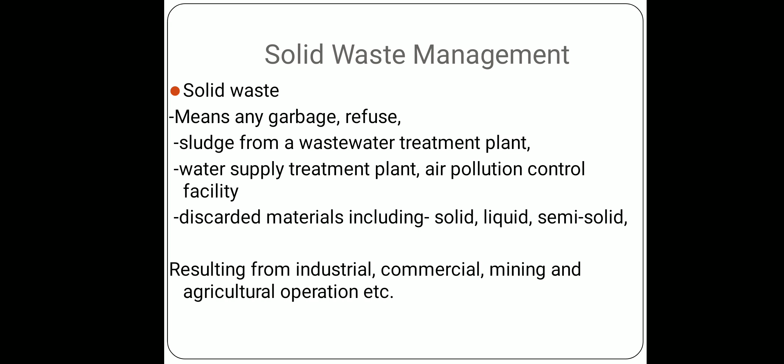Today we will see the new topic related to the environment, that is solid waste management. First, let's see what is meant by solid waste. Solid waste means any garbage or refuse. It may be sludge from wastewater treatment plant, water supply treatment plant, air pollution control facilities, or discarded material including solid, liquid, or semi-solid, resulting from industrial, commercial, mining, as well as agricultural operations.

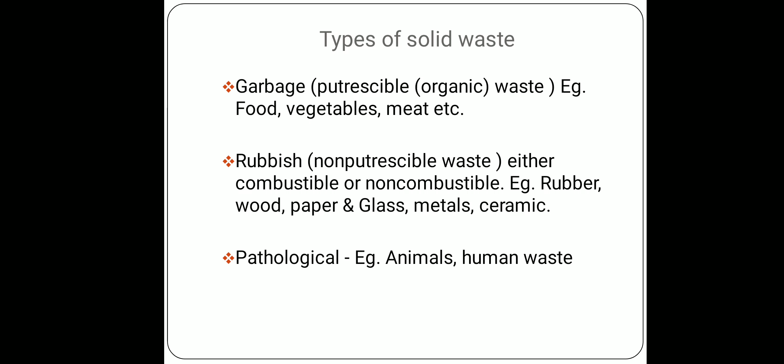There are different types of solid waste, like garbage, that is organic waste, example food, vegetables, meat, etc. Then rubbish, that is non-putrescible waste, either combustible or non-combustible, example rubber, wood, paper, glass, metals, ceramics, etc. Then pathological material like animals, human waste, etc.

These solid wastes are classified as domestic waste, which is material generated in homes. Then industrial waste, example paints, sand, metal, different chemicals, depending on the type of industries, there are different types of solid waste generation. Then biomedical waste, generally generated in hospitals. Then agricultural waste, that is farm animal manure and crop residues.

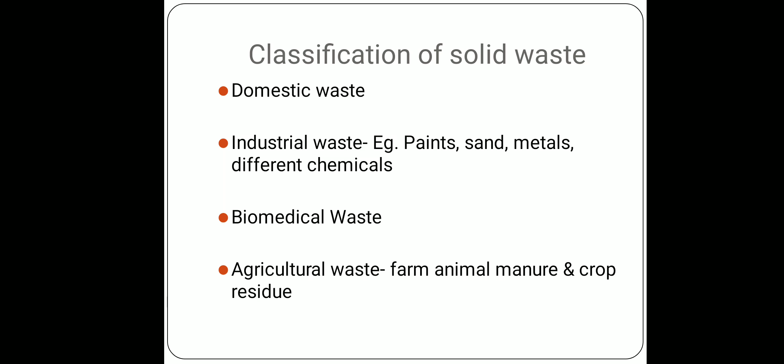There are different types of solids which affect the environment in different ways. Let's see the impact of solid waste on environment. It may be responsible for different types of diseases, obstruction of drains, and it causes different pollutions, example land and water pollution. Many times it may be responsible for air pollution as well.

Spreading of different types of diseases. Flies also spread diseases like diarrhea, dysentery, etc. Due to dumping of waste, there is decrease in soil fertility and loss of biodiversity. If solid waste is not properly managed and is disposed anywhere haphazardly, then definitely it is responsible for the degradation of that area, that is soil of that particular area, due to different types of solids.

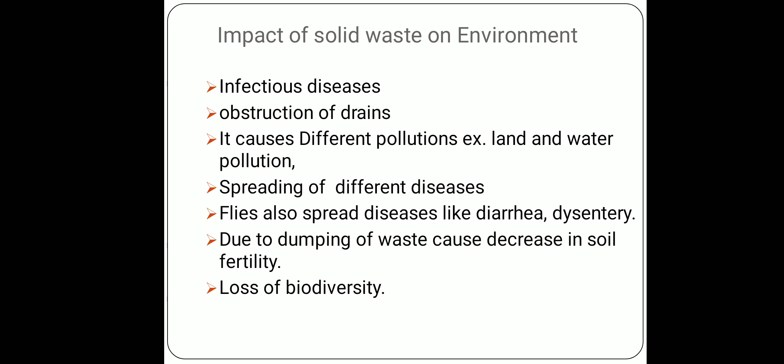Definitely there will be effect on the surrounding environment, and directly or indirectly it is responsible for degradation of the environment and loss of biodiversity. Again, it is harmful for the environment.

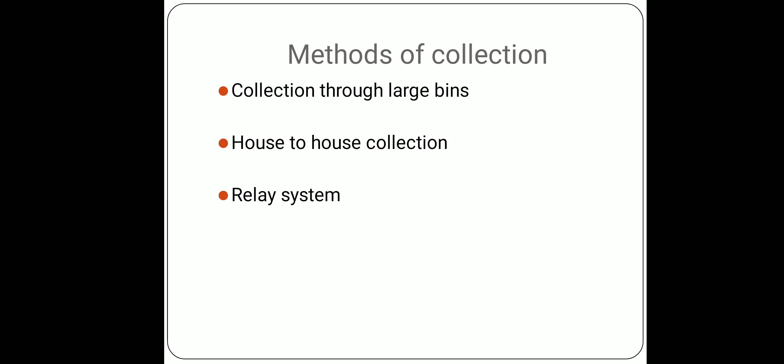There are different methods of collection of solids, that is collection through large bins, generally done in municipal areas. Then house to house collection. Then another method is the relay system. This is the vehicle which is used for collection of solid waste, and it is rear loading compactor.

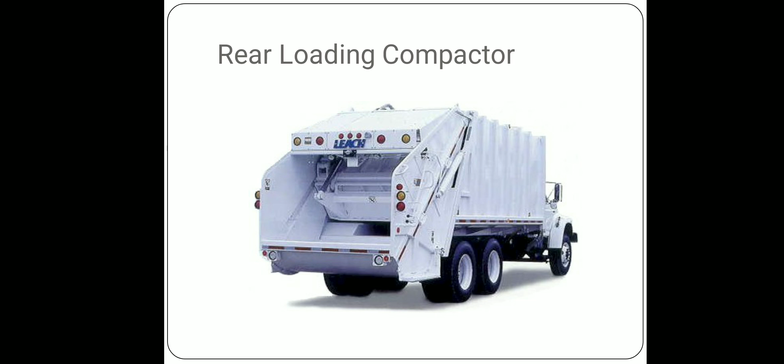There are different systems of collection of solid waste, that is refuse collection system, which is effective in residential areas. Then commercial waste collection. Then recyclable material collection.

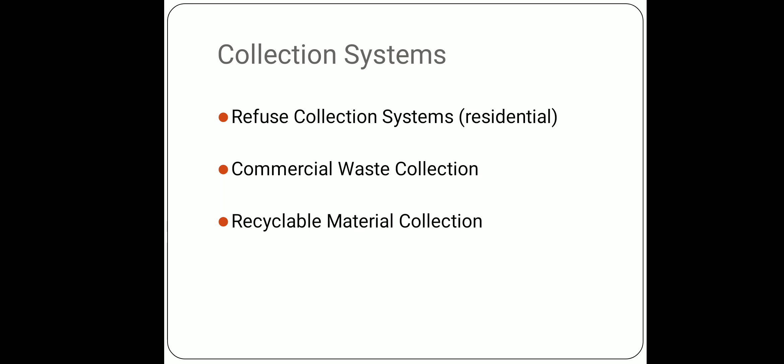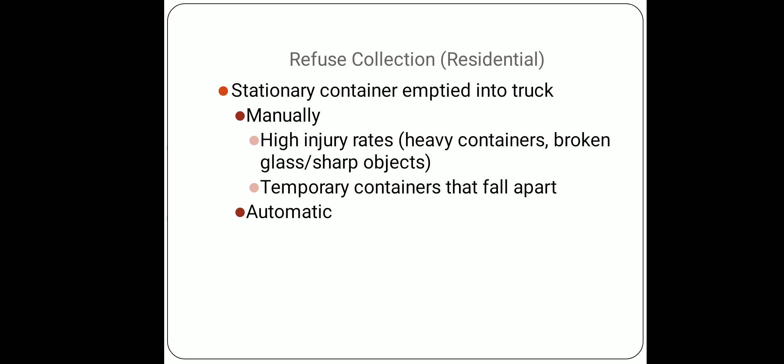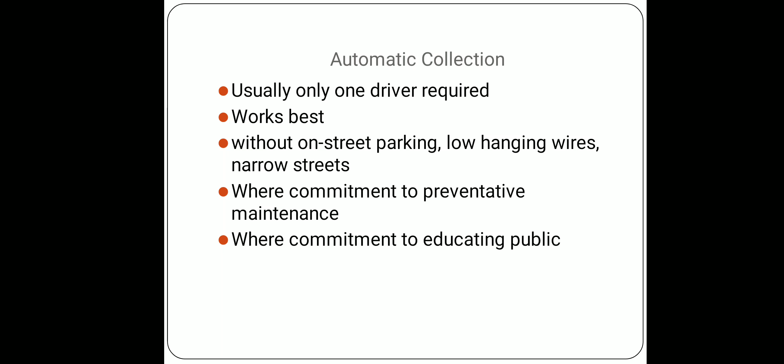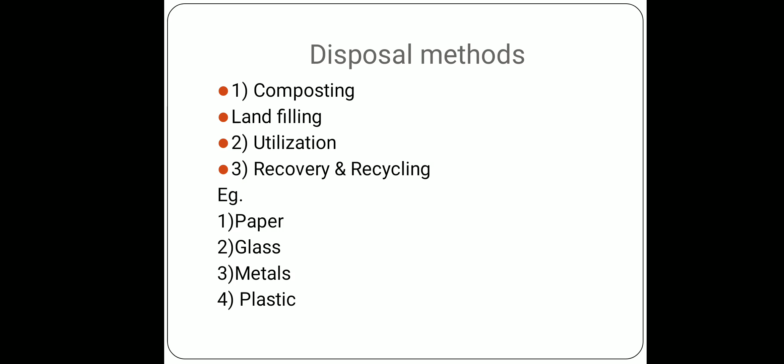Before collection of solid waste, it is very necessary to segregate on the basis of the types of solid waste, and then we can dispose properly. In this way, it is very important to manage solid waste and dispose properly to minimize environmental effects. Thank you very much.